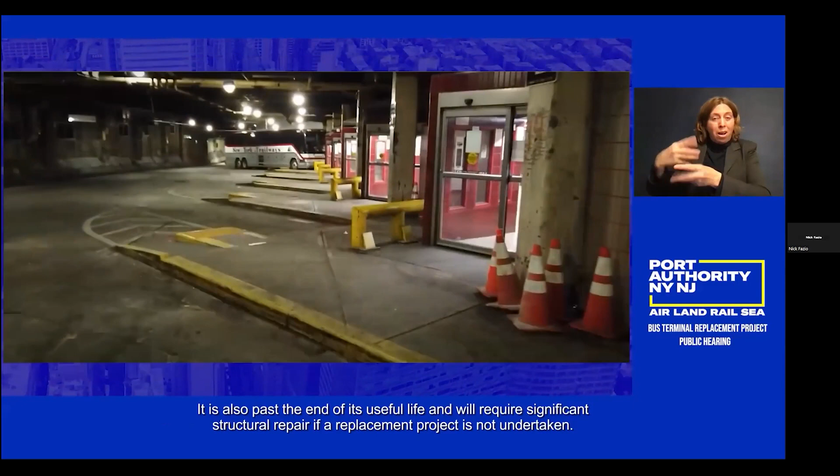The Port Authority needs to support the projected growth of commuter and intercity travel crossing the Hudson, and to address the functional and physical obsolescence of the existing terminal. The existing bus terminal is already at capacity and will not be able to meet future demand. It is also past the end of its useful life and will require significant structural repair if a replacement project is not undertaken. The repair would fix some of the issues facing the building today, but reduce the capacity of the facility to handle buses.

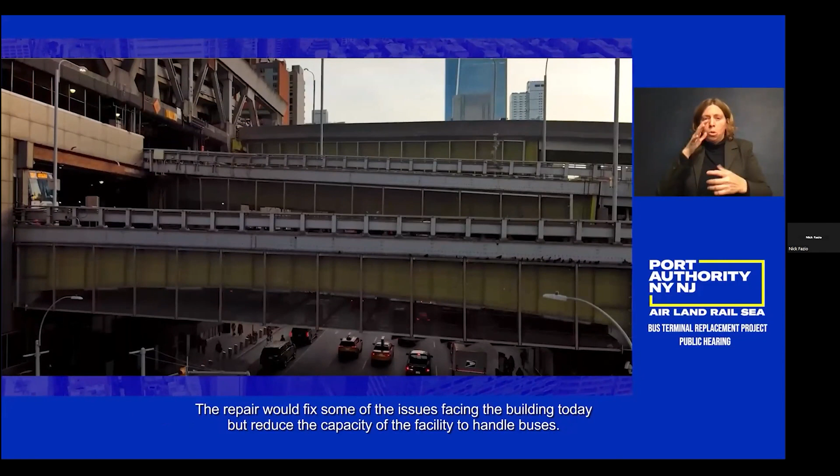The Port Authority needs to address bus operations and storage and staging.

Project goals: the project seeks to improve Trans-Hudson bus operations, improve the passenger experience within the terminal, provide seamless passenger accessibility to NYC transit connections, strive to achieve consistency with local and regional land use plans and initiatives, develop a project that optimizes life cycle costs, and reduce the impacts of bus services on the built and natural environments.

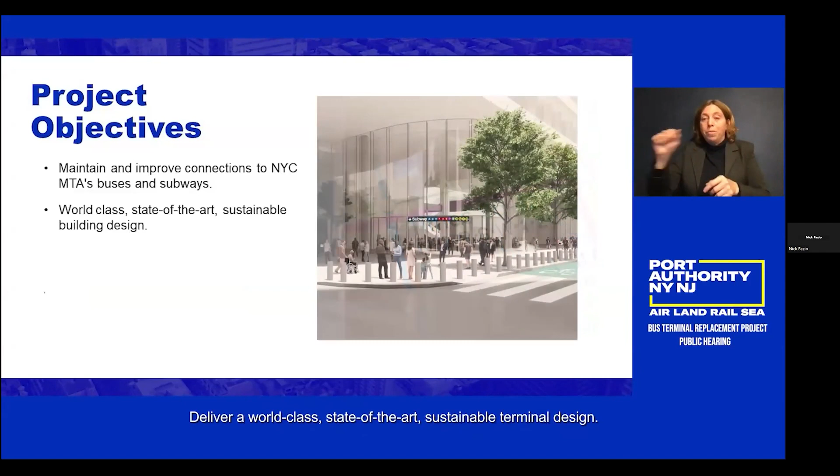Project objectives: an important guiding principle driving this project is the enhancement of the commuter experience within the bus terminal. This principle has shaped the following objectives: maintain and enhance connectivity with subways and mass transit, deliver a world-class, state-of-the-art, sustainable terminal design, preserve and improve pedestrian and ADA accessibility to traveler origins and destinations, and establish direct bus linkages to the Lincoln Tunnel.

There is more detailed information about the project purpose and need, its goals and objectives in the Draft Environmental Impact Statement Reports, Chapters 1 and 2.

Community feedback: in this section, we will review the extensive community engagement conducted to date.

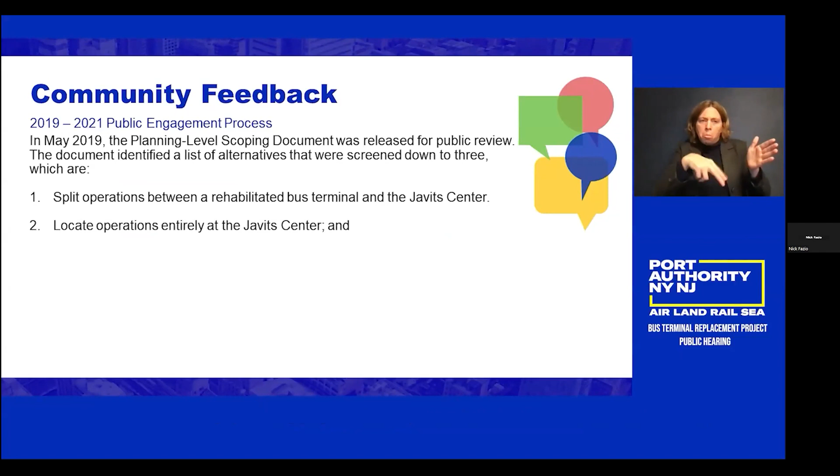In May 2019, the Port Authority released a planning-level scoping document for public review that commenced a 120-day comment period. The document identified a long list of alternatives that were screened down to three alternatives that best met the project purpose and need: split operations between a rehabilitated bus terminal and the Javits Center, locate operations entirely at the Javits Center, and retain operations at the existing bus terminal site and Port Authority properties.

The planning-level draft scoping document, summary of comments and responses, and final scoping report summarizing this process and outcome are all available on the project website, www.PABTreplacement.com. In June 2021, a notice of intent to prepare an environmental impact statement was released to the public, initiating a 45-day comment period to solicit feedback on the NEPA Scoping Information Packet.

Following this period, the final NEPA Scoping Information Packet was published summarizing comments received. This extensive public and stakeholder input during the planning level scoping and NEPA scoping periods informed the Port Authority in formulating its proposal for the modified proposed project, which is referred to as the Bus Terminal Replacement Project.

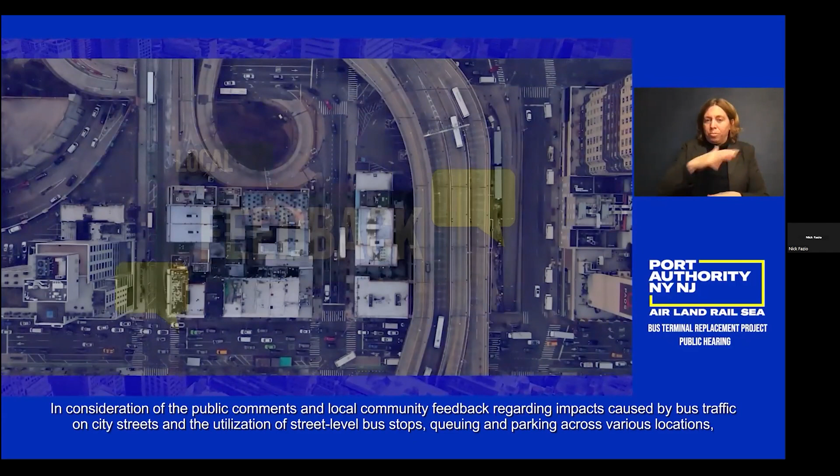Bus storage and staging: in consideration of public comments and local community feedback regarding impacts caused by bus traffic on city streets and the utilization of street-level bus stops, queuing and parking across various locations, the Port Authority responded by incorporating a bus storage and staging facility that will facilitate direct connections between the Lincoln Tunnel and the new terminal. The new ramp structure, connecting the tunnel, storage and staging facility, and new main terminal, will reduce and further minimize any impacts to city streets from buses accessing the replacement facility.

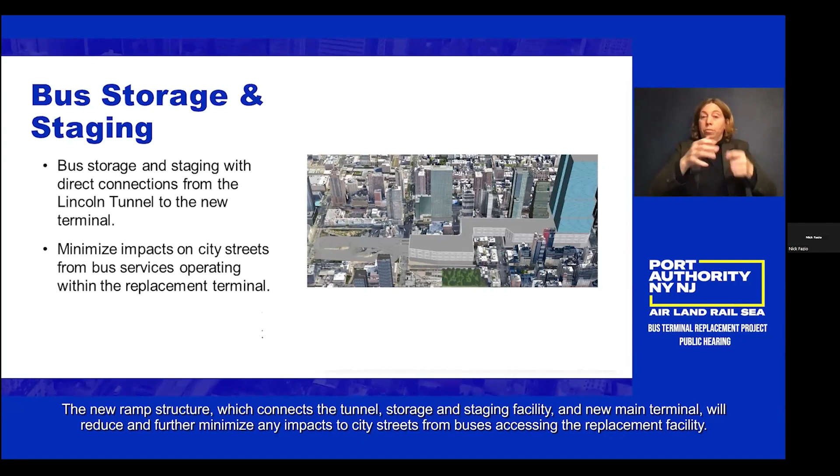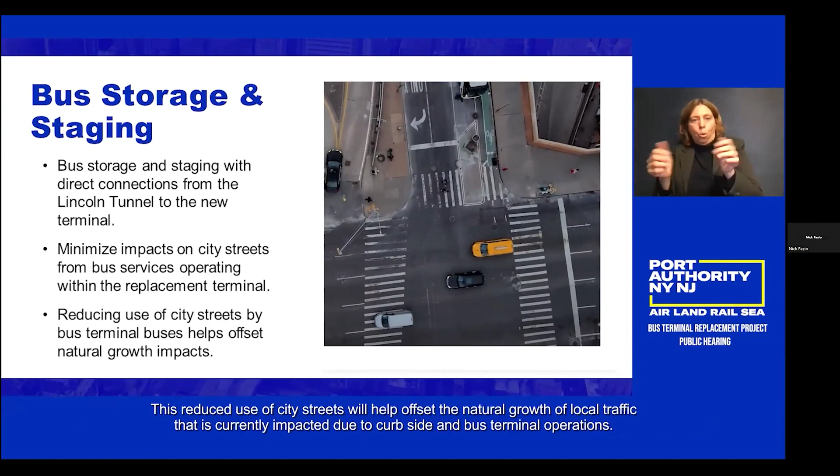This reduced use of city streets will help offset the natural growth of local traffic that is currently impacted due to curbside and bus terminal operations.

Additionally, during the planning level scoping process, the community requested that the Port Authority relocate the intercity buses presently operating at adjacent curbside locations into the scope of the project. Unlike a transit bus service, which has frequent stops within a city, an intercity bus service generally has a single stop in a city and travels long distances to reach other cities.

Presently, some intercity bus services operate within the existing terminal, while others operate curbside along city streets. In response to public comments regarding curbside operations, a dedicated floor within the new main terminal will now facilitate the efficient functioning of intercity bus operations.

Project overview and site plans. In this next section, we share renderings of each project component.

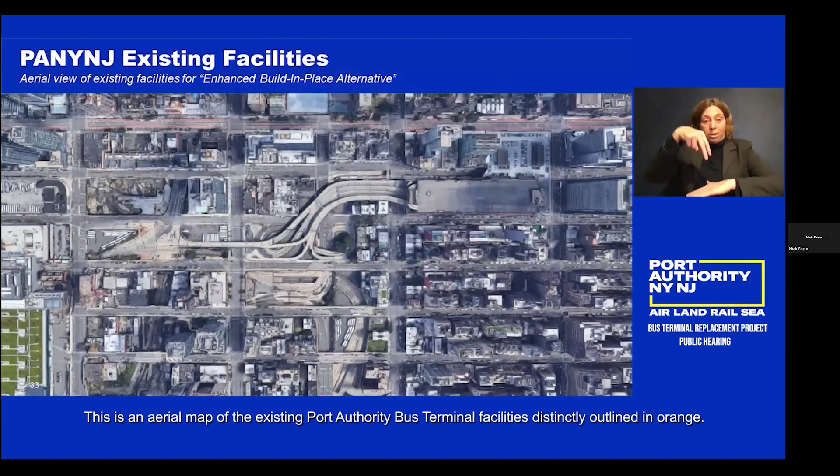This is an aerial map of the existing Port Authority bus terminal facilities, distinctly outlined in orange. The facilities extend from 8th Avenue to 11th Avenue between 39th Street and 42nd Street.

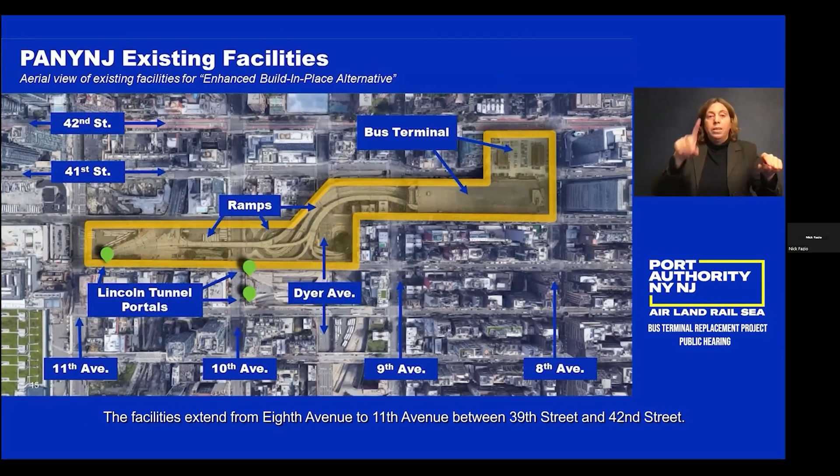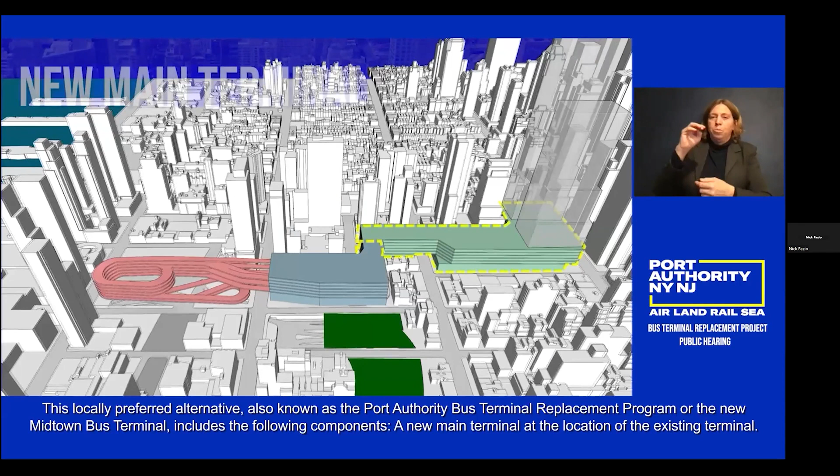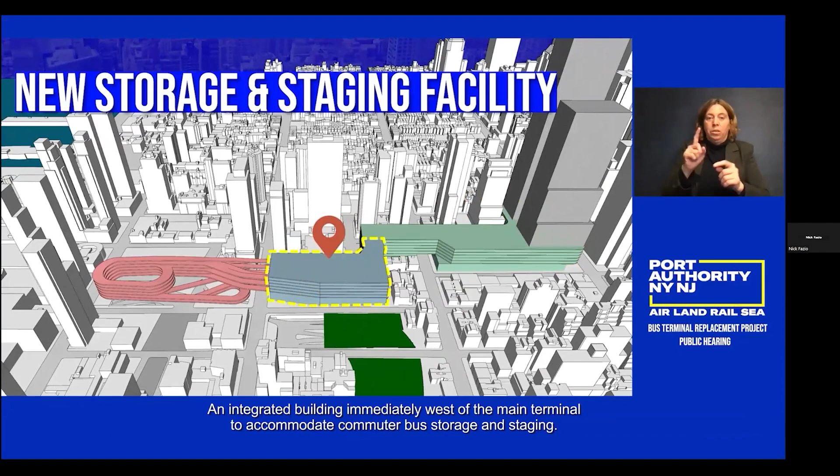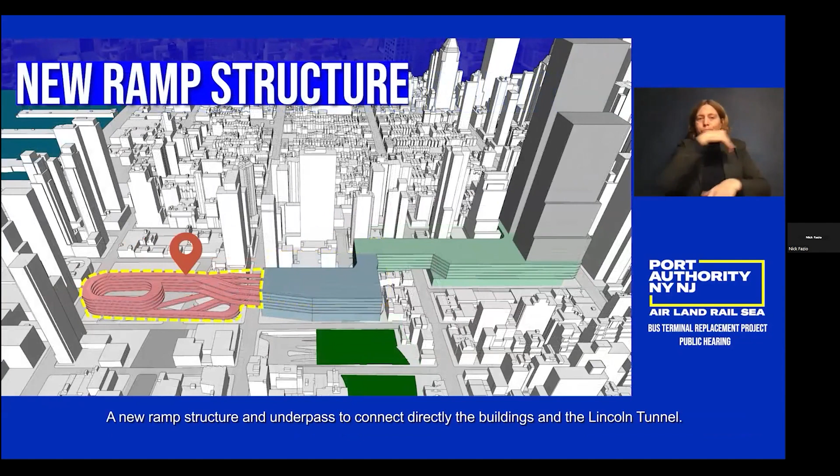Project components. This locally preferred alternative, also known as the Port Authority Bus Terminal Replacement Program, or the New Midtown Bus Terminal, includes the following components: a new main terminal at the location of the existing terminal, utilization of Port Authority property, an integrated building immediately west of the main terminal to accommodate commuter bus storage and staging, a new ramp structure and underpass to connect directly the buildings and the Lincoln Tunnel, publicly accessible open space, and private development at 2 locations on Port Authority property.

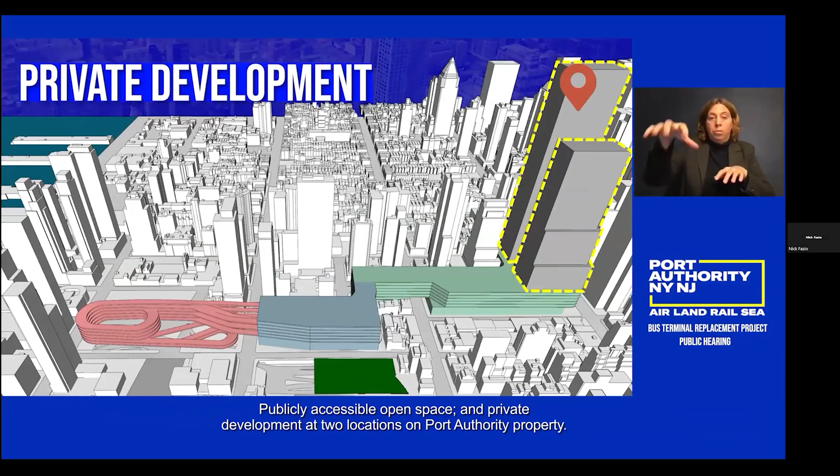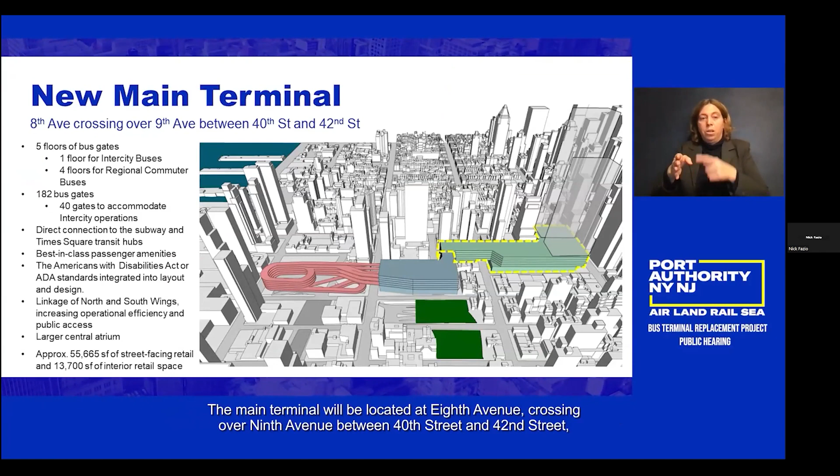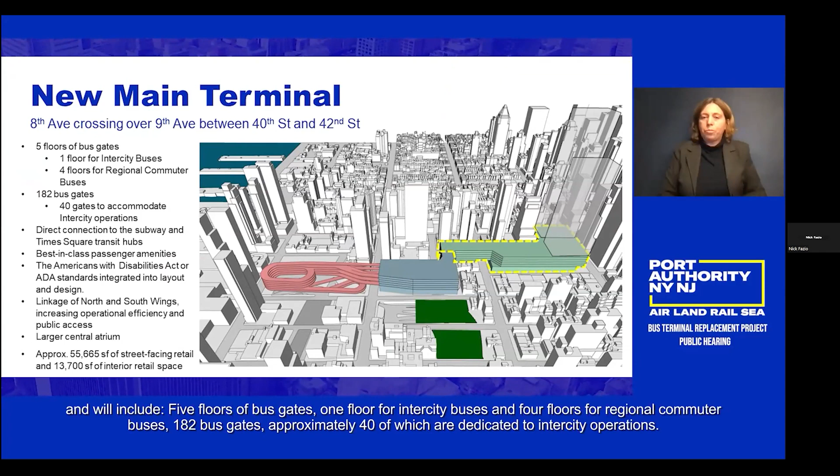Now we will walk through each major component of the proposed project. The main terminal will be located at 8th Avenue crossing over 9th Avenue between 40th Street and 42nd Street and will include 5 floors of bus gates, 1 floor for intercity buses, and 4 floors for regional commuter buses. 182 bus gates, approximately 40 of which are dedicated to intercity operations.

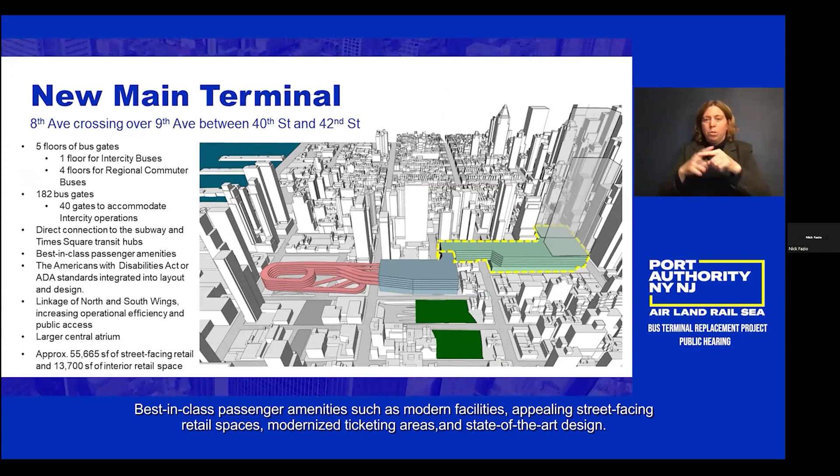Direct connection to the 8th Avenue subway and Times Square transit hubs. Best-in-class passenger amenities such as modern facilities, appealing street-facing retail spaces, modernized ticketing areas, and state-of-the-art design. The Americans with Disabilities Act, or ADA standards, integrated into layout and design.

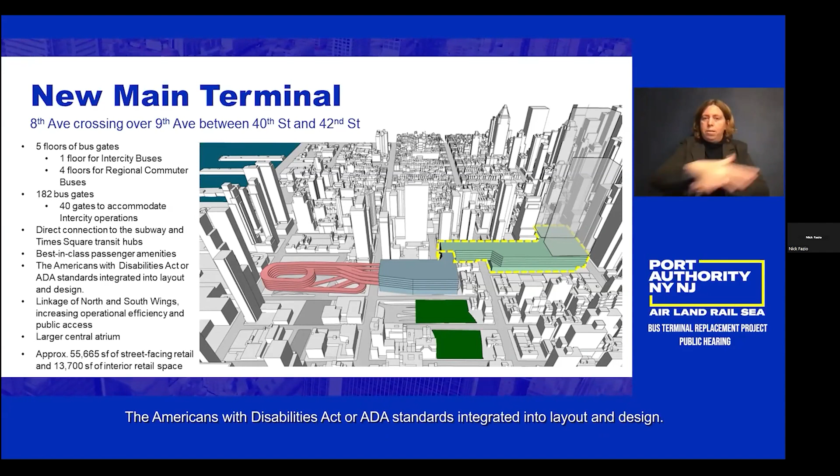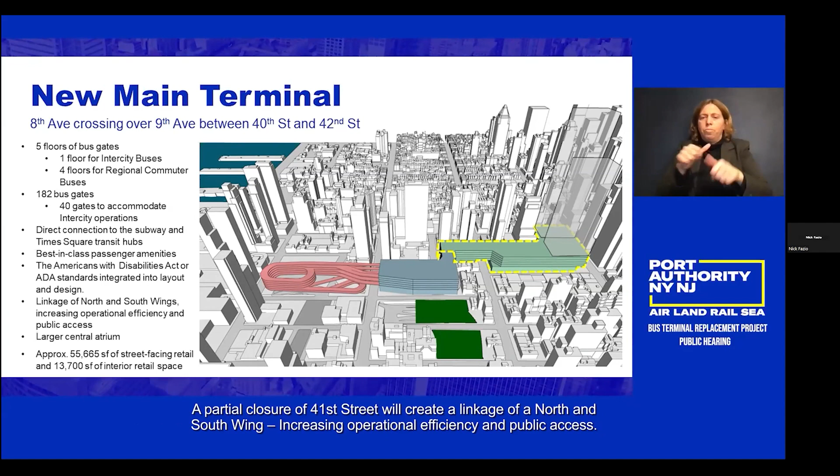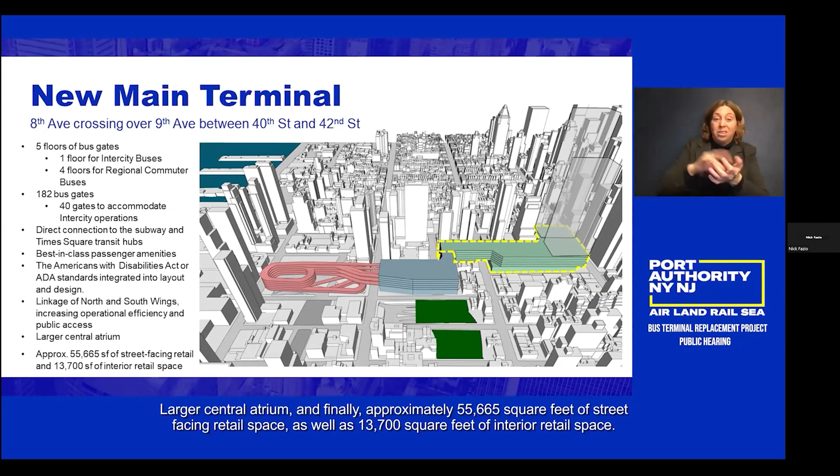A partial closure of 41st Street will create a linkage of a north and south wing, increasing operational efficiency and public access. Larger central atrium, and finally, approximately 55,665 square feet of street-facing retail space, as well as 13,700 square feet of interior retail space.

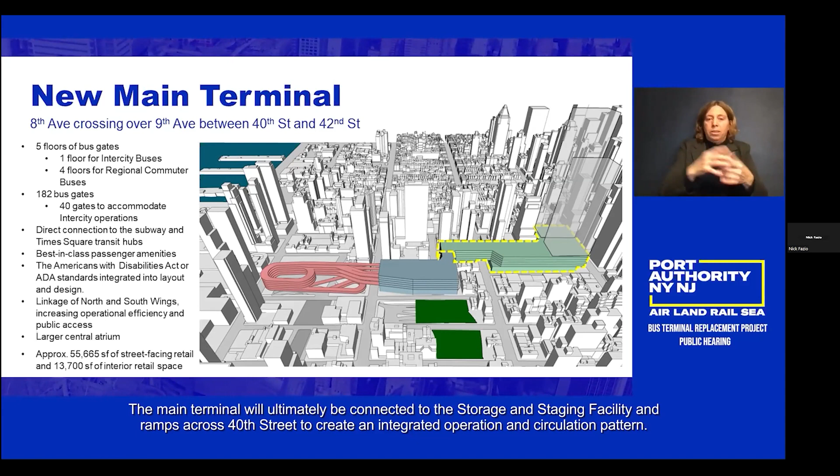The main terminal will ultimately be connected to the storage and staging facility and ramps across 40th Street to create an integrated operation and circulation pattern.

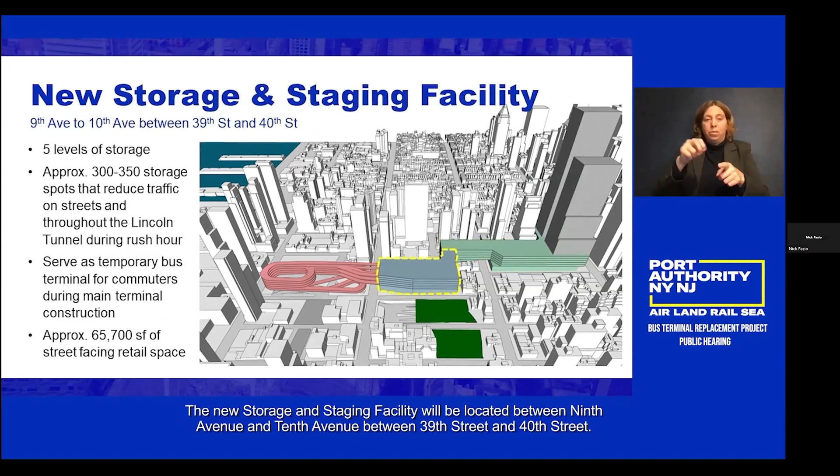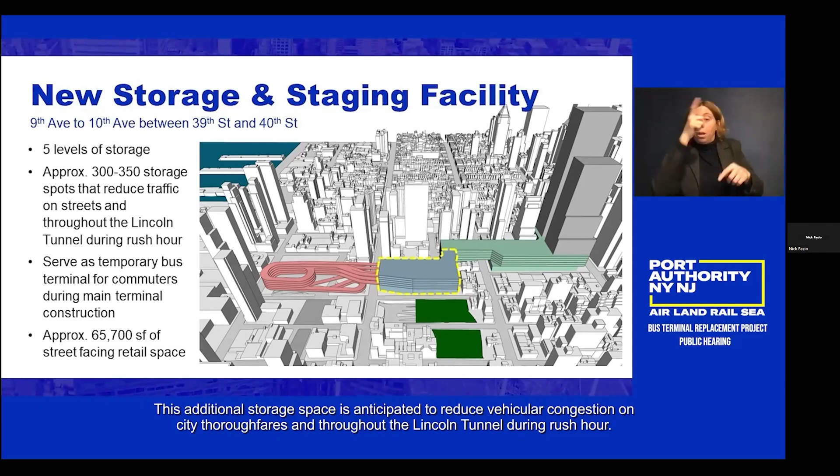The new storage and staging facility will be located between 9th Avenue and 10th Avenue between 39th Street and 40th Street. This facility is designed to encompass 5 levels of storage, accommodating approximately 300 to 350 storage spots. This additional storage space is anticipated to reduce vehicular congestion on city thoroughfares and throughout the Lincoln Tunnel during rush hour. The storage and staging facility will serve as a temporary bus terminal for commuters during the construction phase of the main terminal.

Additionally, the facility will provide approximately 65,700 square feet of additional at-grade retail space.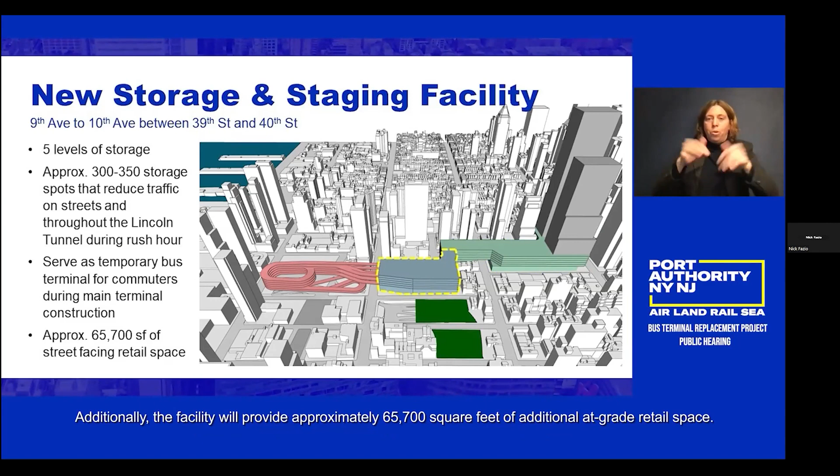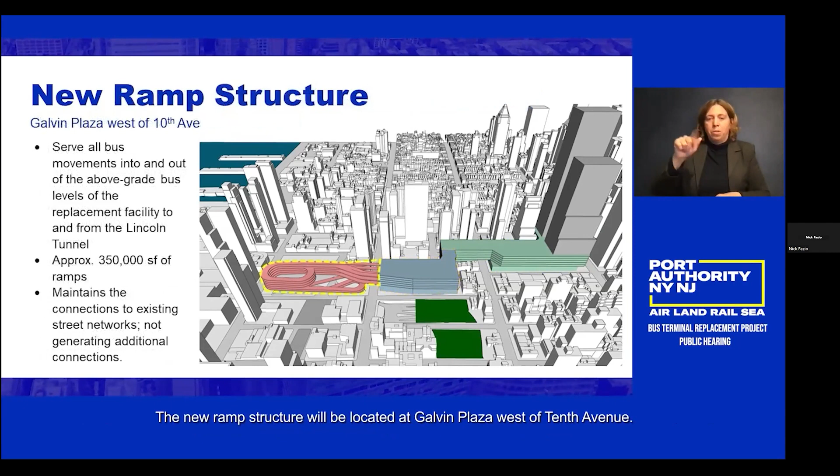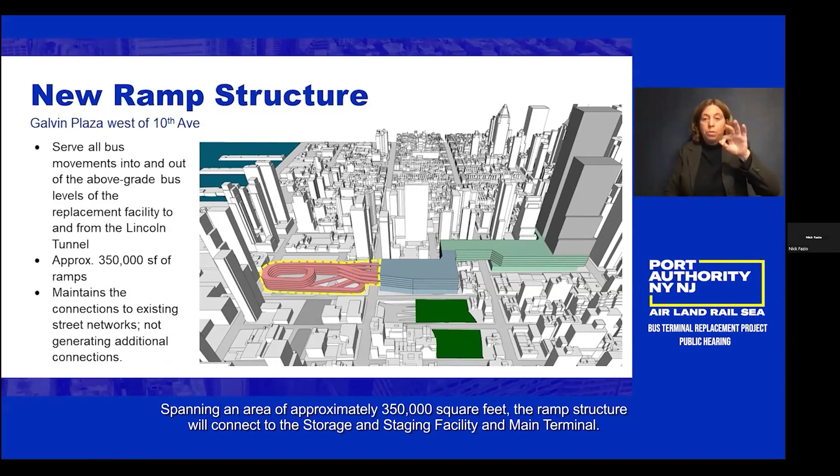The new ramp structure will be located at Galvin Plaza, west of 10th Avenue. The ramp structure will serve all bus movements into and out of the above-grade bus levels of the replacement facility to and from the Lincoln Tunnel. Spanning an area of approximately 350,000 square feet, the ramp structure will connect to the storage and staging facility and main terminal.

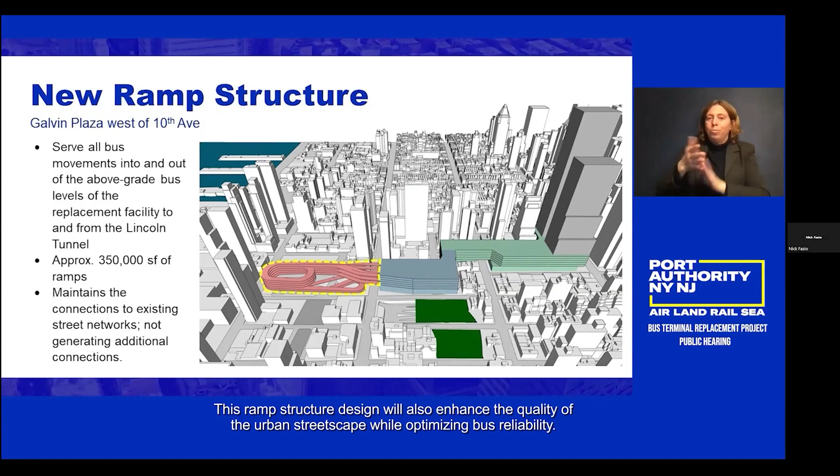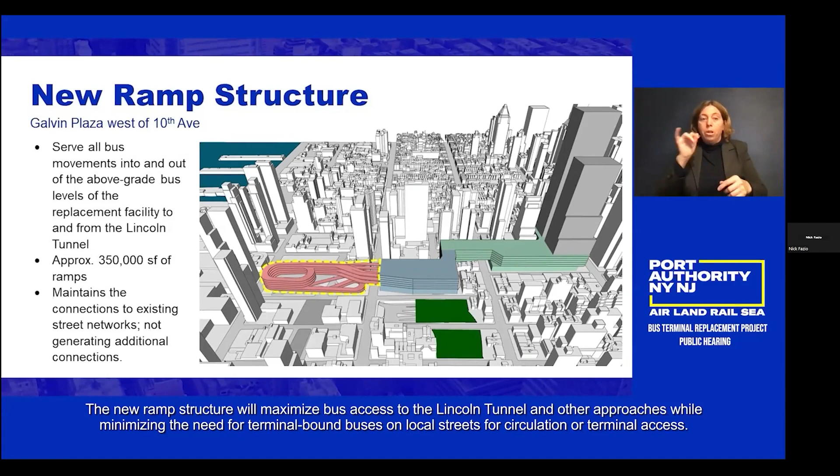The design of the ramps will greatly relieve congestion on 40th Street and 9th Avenue. This ramp structure design will also enhance the quality of the urban streetscape while optimizing bus reliability. The new ramp structure will maximize bus access to the Lincoln Tunnel and other approaches while minimizing the need for terminal-bound buses on local streets for circulation or terminal access.

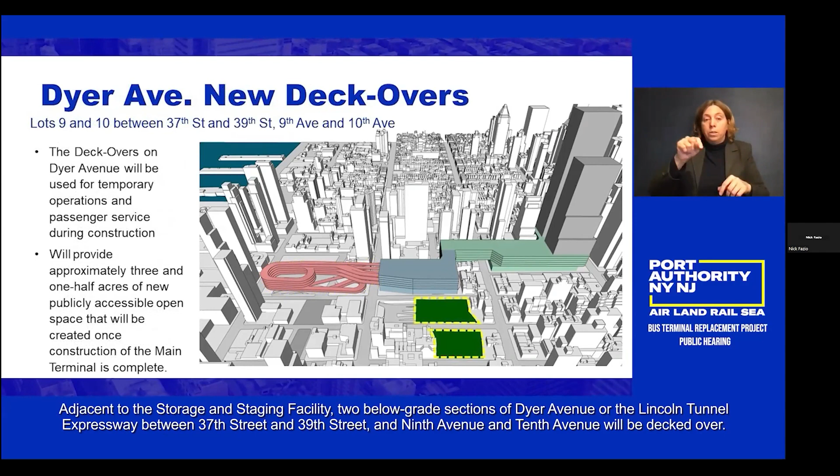Adjacent to the storage staging facility, 2 below-grade sections of Dyer Avenue, or the Lincoln Tunnel Expressway, between 37th Street and 39th Street, and 9th Avenue and 10th Avenue, will be decked over. The deckovers on Dyer Avenue will serve as a location for temporary bus operations and potentially for construction staging during the development phase of the replacement terminal.

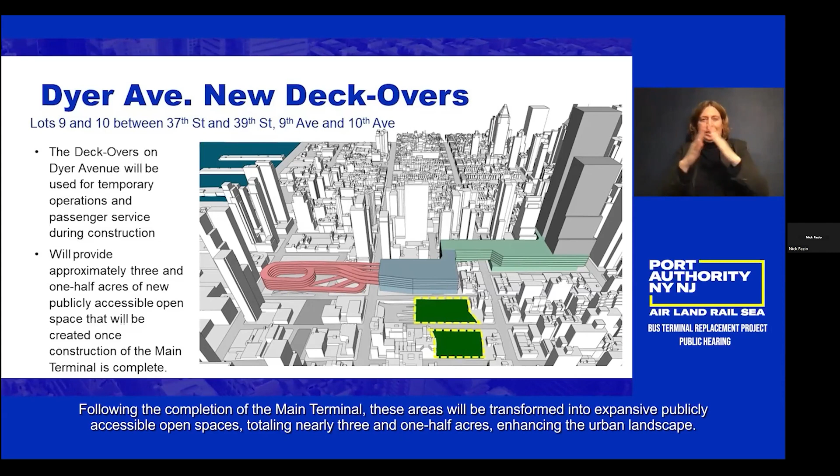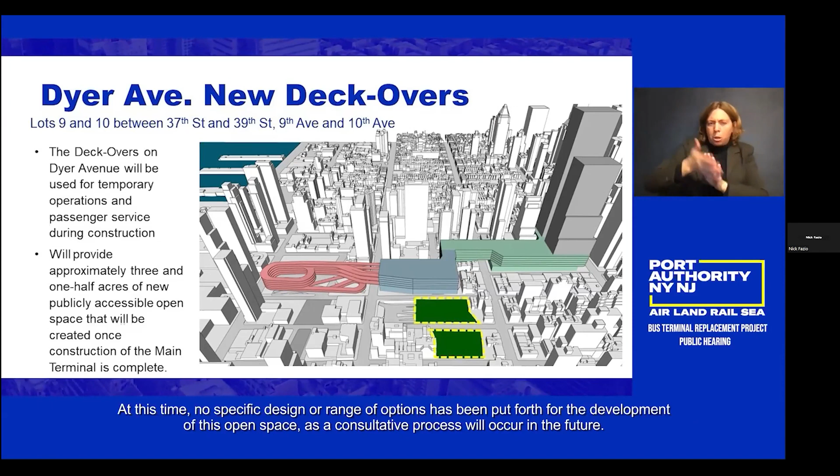Following the completion of the main terminal, these areas will be transformed into expansive, publicly accessible open spaces, totaling nearly 3½ acres, enhancing the urban landscape. The Port Authority is committed to collaborating closely with community stakeholders on the design and operation of the open space. At this time, no specific design or range of options has been put forth for the development of this open space, as a consultative process will occur in the future.

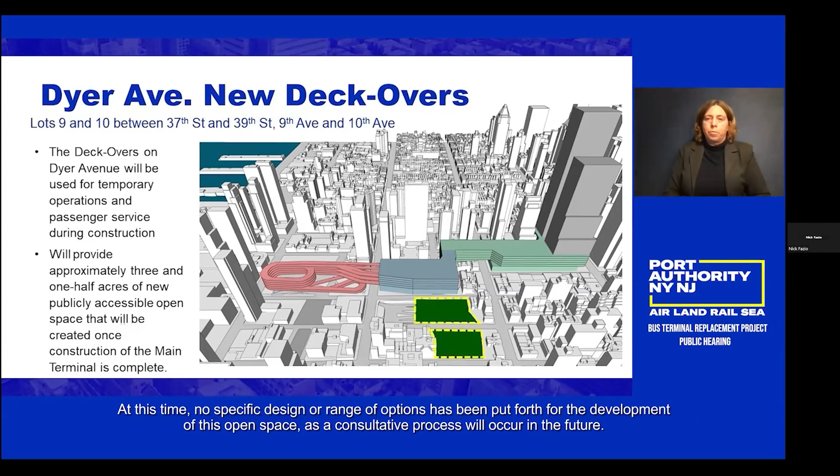As part of the project, 2 private development towers are proposed to be built on Port Authority property located on 8th Avenue between 40th Street and 42nd Street. The 2 towers are proposed as commercial offices.

Tower 1 would contain up to approximately 3 million gross square feet of commercial space with an approximate height of 1,200 feet above grade and a lobby entrance located on the corner of 8th Avenue and 42nd Street.

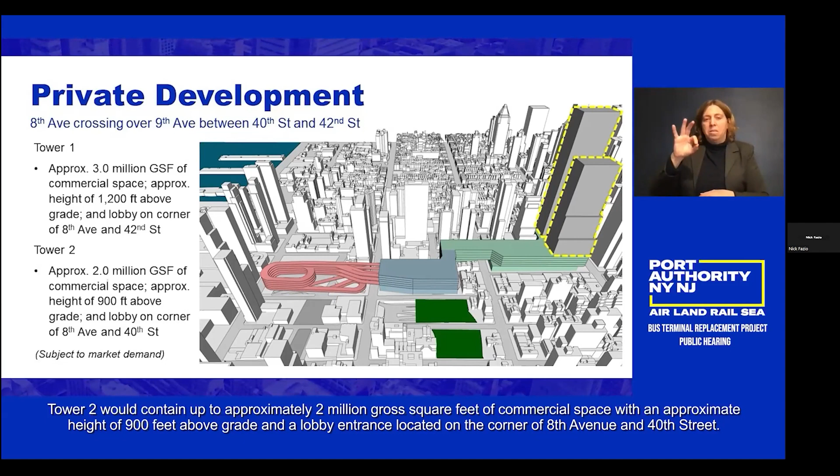Tower 2 would contain up to approximately 2 million gross square feet of commercial space, with an approximate height of 900 feet above grade and a lobby entrance located on the corner of 8th Avenue and 40th Street. These approximations are subject to market demand. The funding strategy for the project would include financing from this private development and payment in lieu of taxes.

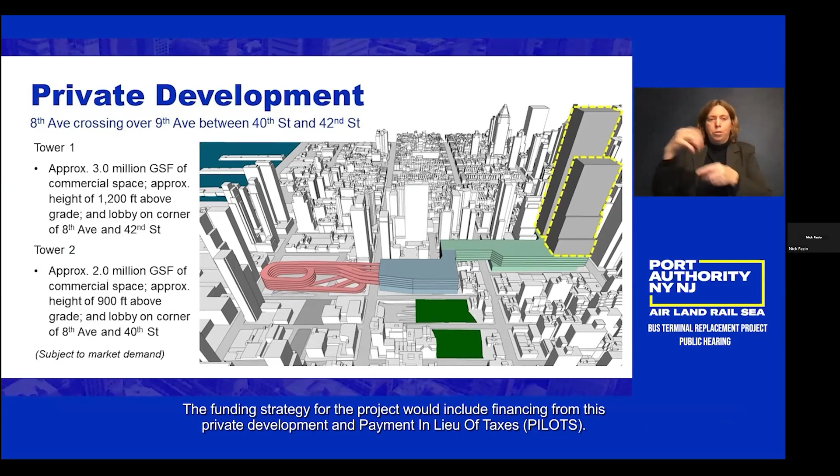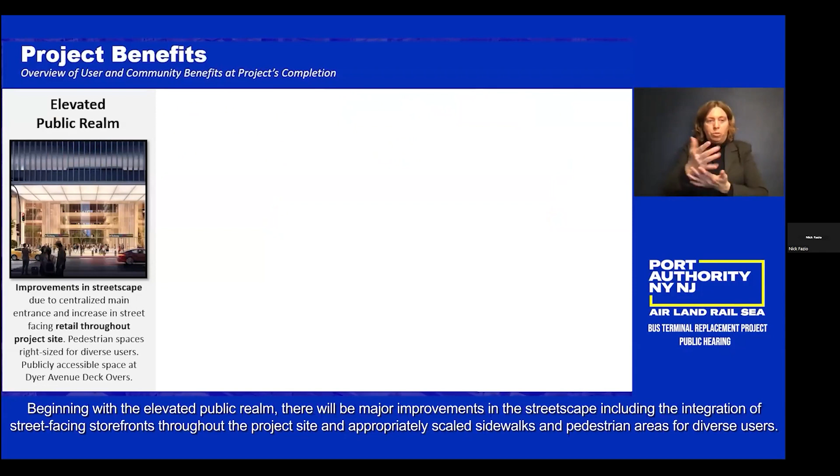Upon completion, the Port Authority Bus Terminal will provide many advantages to its diverse customers, community members, and various stakeholders, including an elevated public realm, significantly enhanced user experience, improved vehicular and pedestrian flow, and green energy transition, to name a few. Beginning with the elevated public realm, there will be major improvements in the streetscape, including the integration of street-facing storefronts throughout the project site and appropriately scaled sidewalks and pedestrian areas for diverse users. The conversion of the Dyer Avenue deck overs into publicly accessible space will further augment these improvements to the public realm.

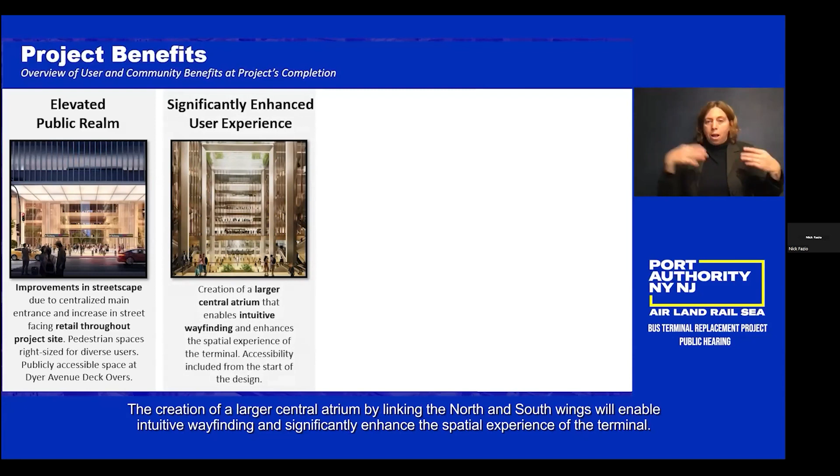The creation of a larger central atrium by linking the north and south wings will enable intuitive wayfinding and significantly enhance the spatial experience of the terminal.

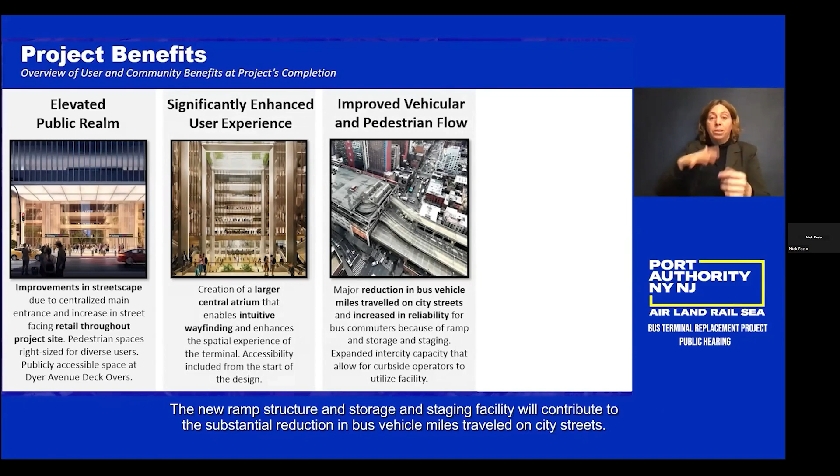The new ramp structure and storage and staging facility will contribute to the substantial reduction in bus vehicle miles traveled on city streets. This streamlined traffic flow will enhance the reliability of bus commutes, benefiting the experience of commuters. Moreover, the expanded intercity capacity will accommodate curbside operators using the facility.

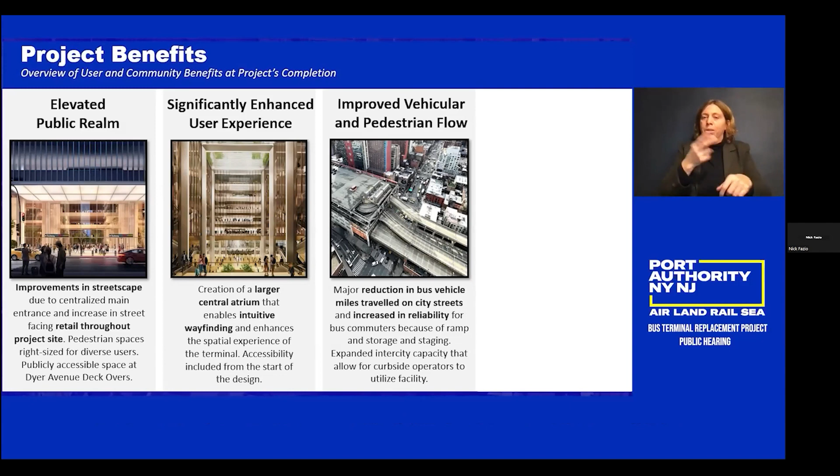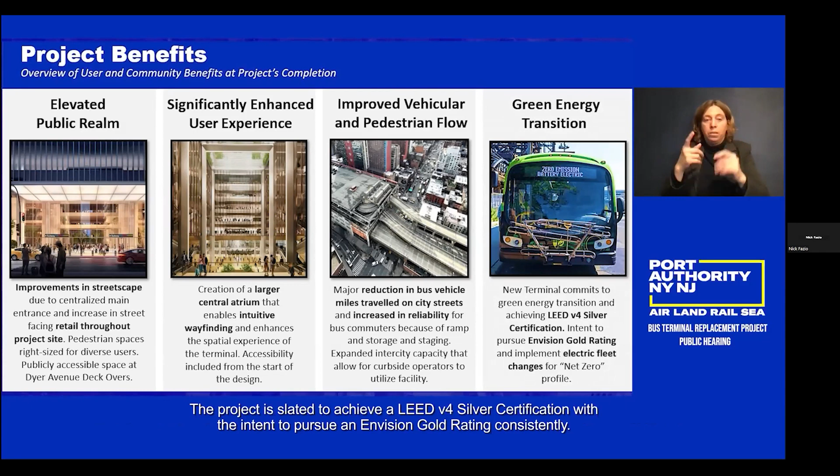Lastly, the new terminal will embrace a green energy transition. The project is slated to achieve a LEED v4 Silver certification, with the intent to pursue an Envision Gold rating consistently. This aligns with the adoption of electric fleet changes and the incorporation of modern energy-efficient systems within the terminal, striving towards a net zero carbon profile.

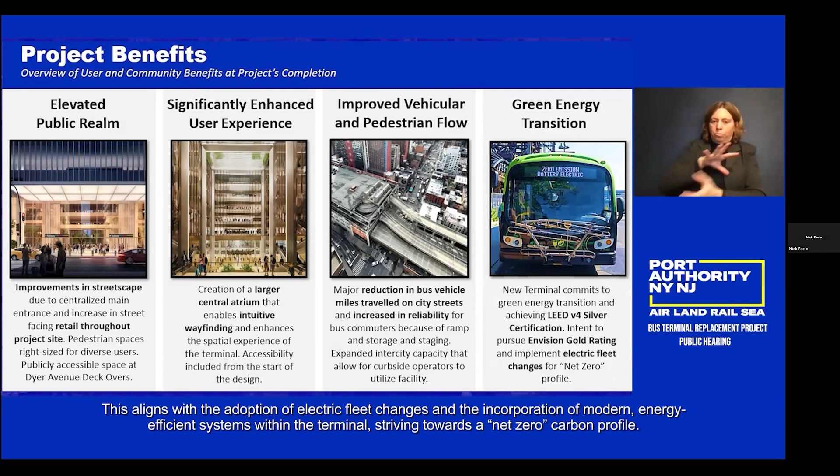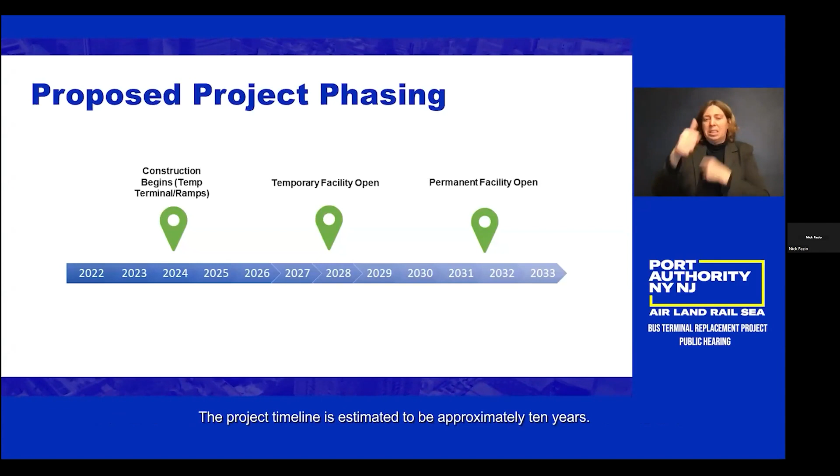In this next section, we will provide an overview of the project phasing as well as the construction process. The project timeline is estimated to be approximately 10 years. Following scoping, the first 2.5 years of the project, beginning in January 2022, consists of an environmental review and the Uniform Land Use Review Procedure, or ULURP, for the proposed project.

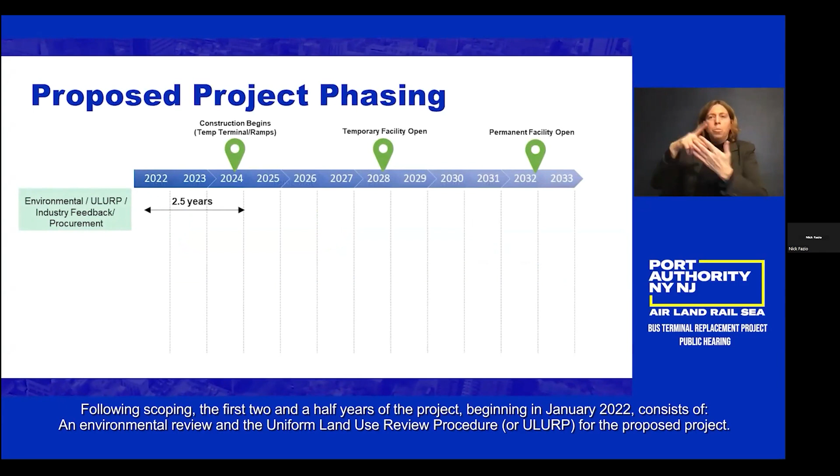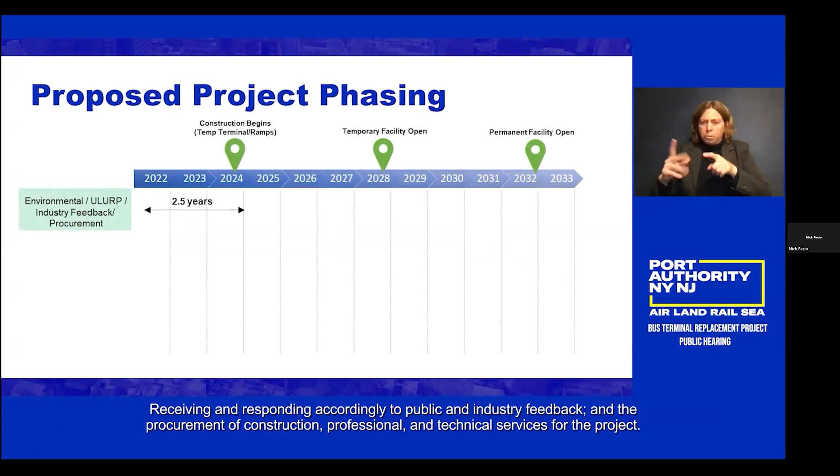Receiving and responding accordingly to public and industry feedback, and the procurement of construction, professional, and technical services for the project. The proposed project's timeline entails an estimated 8-year construction period, starting in 2024 through the end of 2032.

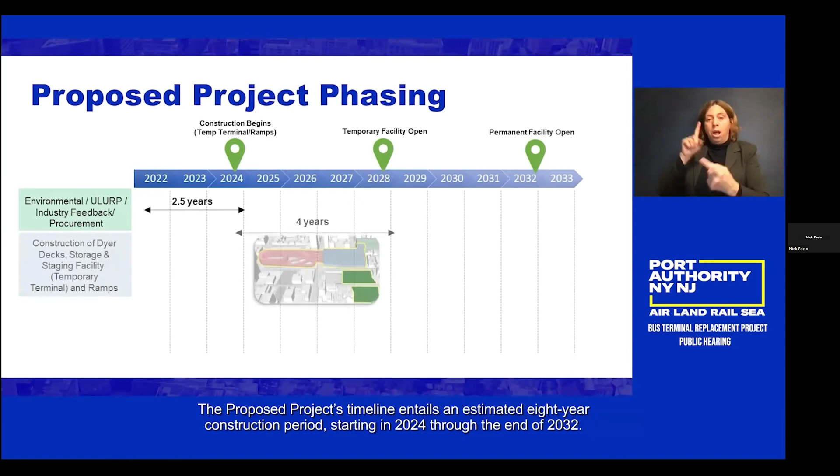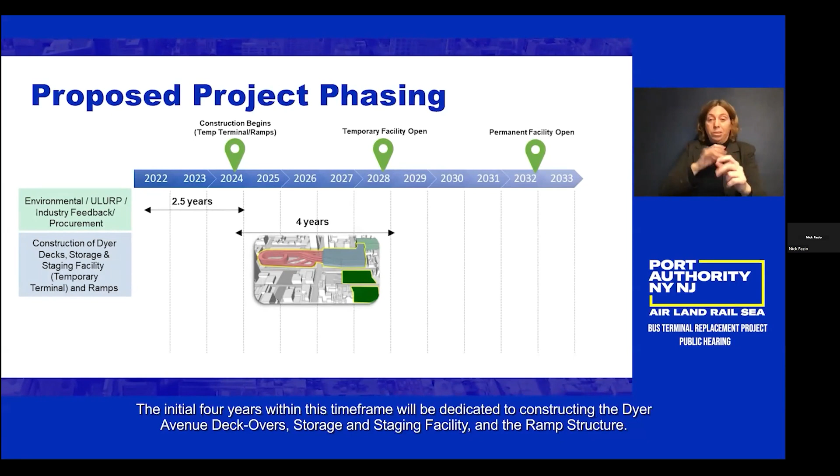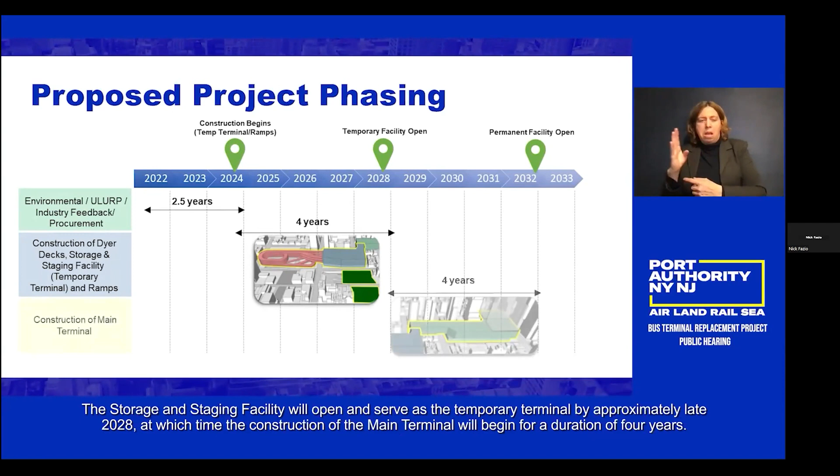The initial 4 years within this timeframe will be dedicated to constructing the Dyer Avenue deckovers, storage and staging facility, and the ramp structure. The storage and staging facility will open and serve as the temporary terminal by approximately late 2028, at which time the construction of the main terminal will begin for a duration of 4 years.

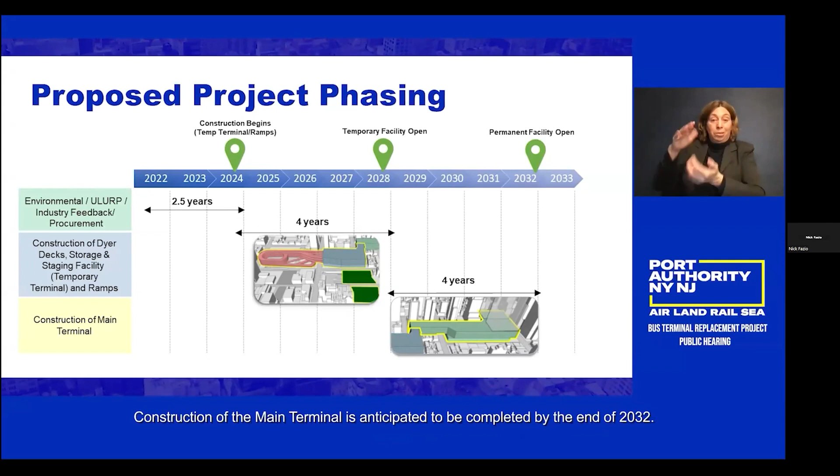The construction of the main terminal will incorporate foundational work for the private development set to occur independently in the future. Construction of the main terminal is anticipated to be completed by the end of 2032. The private development will occur after then and are expected to be completed by 2040.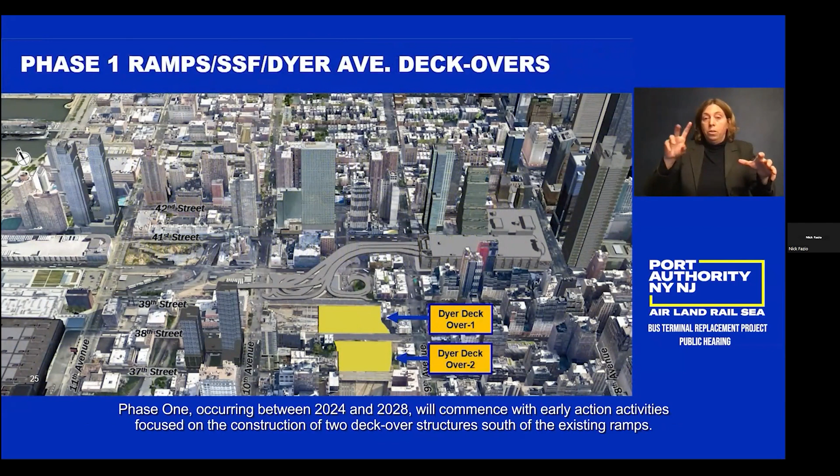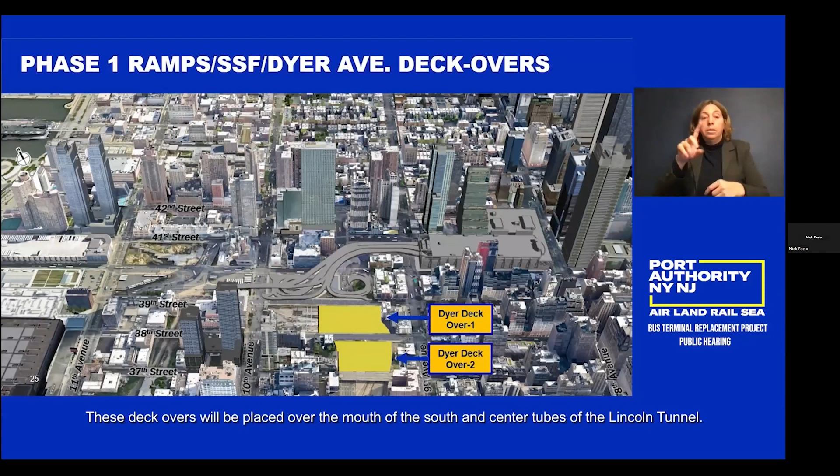The following renderings will depict the 8-year construction period organized into 2 major phases. Phase 1, occurring between 2024 and 2028, will commence with early action activities focused on the construction of 2 deck-over structures south of the existing ramps. These deckovers will be placed over the mouth of the south and center tubes of the Lincoln Tunnel.

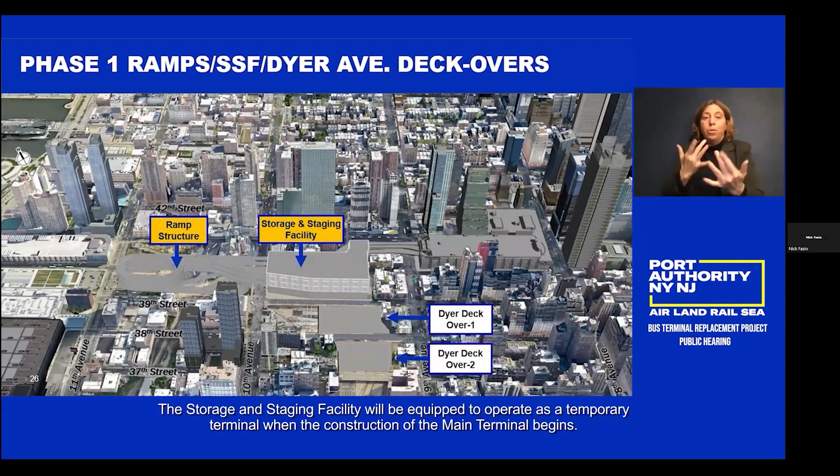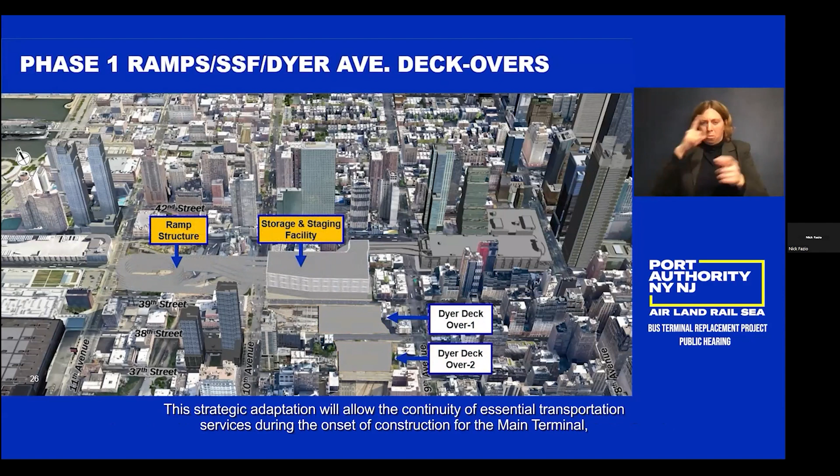Additionally, Phase 1 will include the construction of the ramp structure and storage and staging facility. The storage and staging facility will be equipped to operate as a temporary terminal when the construction of the main terminal begins. This strategic adaptation will allow the continuity of essential transportation services during the onset of construction for the main terminal, thus minimizing disruptions and maintaining the uninterrupted provision of transportation services throughout the subsequent phases of the project.

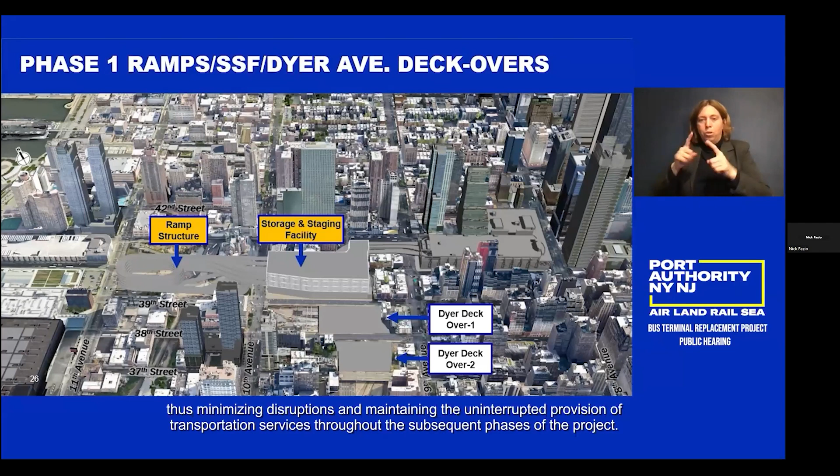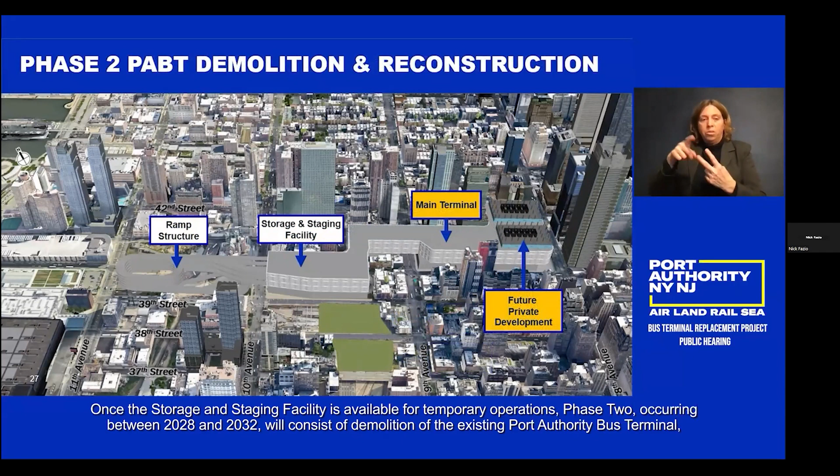Once the storage and staging facility is available for temporary operations, Phase 2, occurring between 2028 and 2032, will consist of demolition of the existing Port Authority bus terminal, construction of the new main terminal, as well as the foundational work of 2 private development towers.

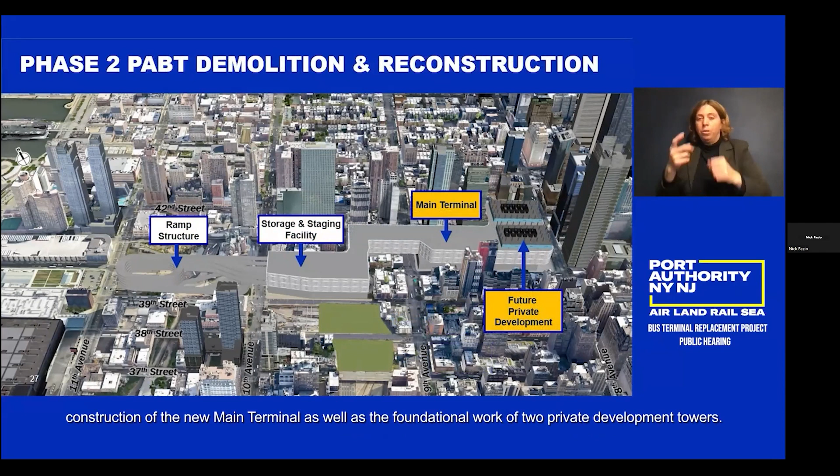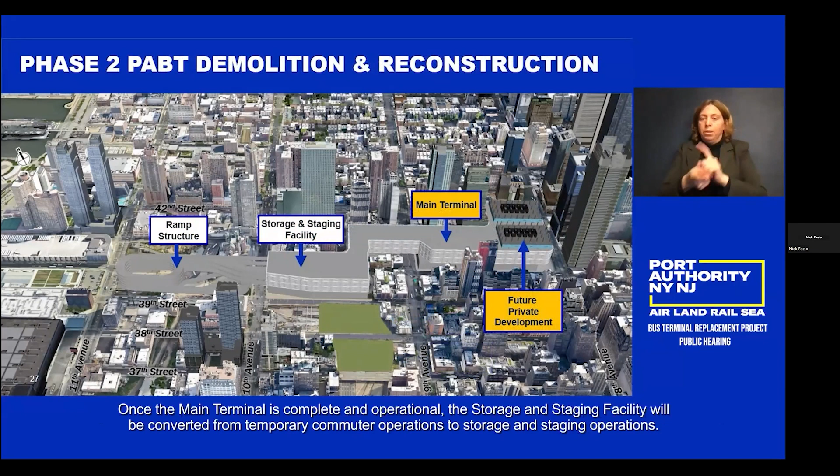Once the main terminal is complete and operational, the storage and staging facility will be converted from temporary commuter operations to storage and staging operations. The Dyer Avenue deckovers can then be converted to public open space, with the foundation and cores of 2 private towers incorporated in the design and construction of the new bus terminal.

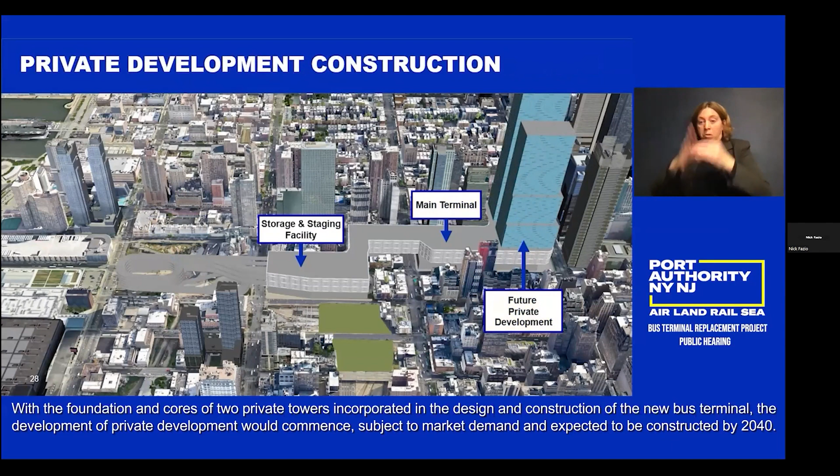The development of private development would commence subject to market demand and expected to be constructed by 2040. The sale of the development rights and payment in lieu of taxes for the 2 commercial office towers are needed to fund the project.

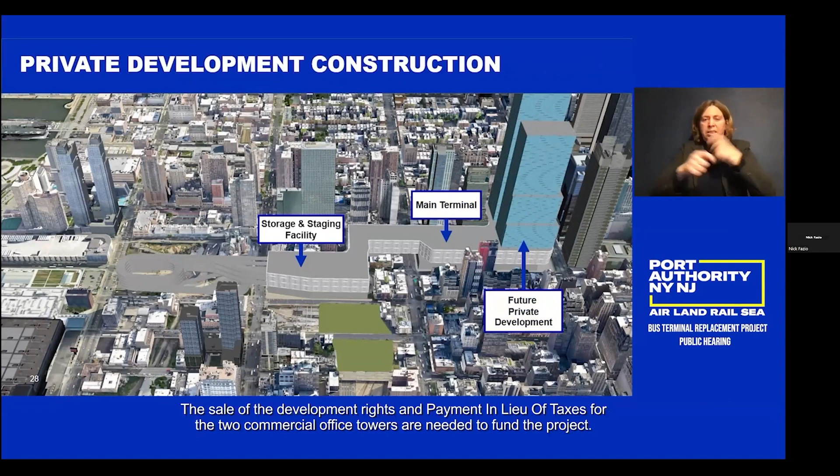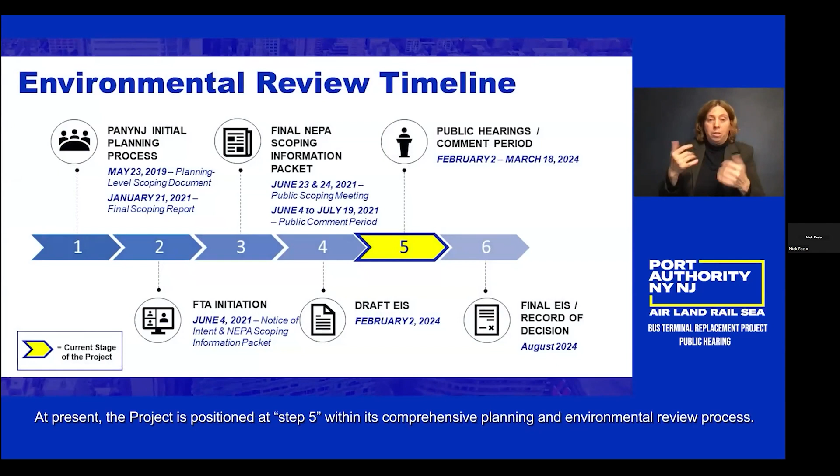In this next section, we will conclude with an overview of the environmental timeline and next steps. At present, the project is positioned at Step 5 within its comprehensive planning and environmental review process. The DEIS public hearings and 45-day comment period began with the publication of the DEIS.

In terms of the next steps, the project team will consolidate all comments received during public meetings, including those submitted via the project website, email, mail, and voicemail. Then the project will progress to Step 6, in which the team will prepare and release a final environmental impact statement and the record of decision by the summer of 2024.

Following this presentation, attendees will have the opportunity to provide comments. For those who have pre-registered, the moderator will call upon your name in the order your registration was received. Each participant will have 3 minutes to articulate their comments. If you have not pre-registered, you may request to do so once the public hearing is underway, and you will be called upon if time permits.

Alternatively, written submissions of comments can be submitted before and after the in-person public hearing through the designated website www.pabtreplacement.com, by email at pabtreplacementnipa@panyj.gov, by phone leaving a voicemail at 929-502-7304, or by postal correspondence to the Port Authority of New York and New Jersey, 4 World Trade Center, 150 Greenwich Street, 25th floor, New York, New York, zip code 10007, attention Miss Elizabeth Rogak, Esquire, or to the Federal Transit Administration, Region 2, 1 Bowling Green, Room 428, New York, New York, zip code 10004-1415, attention Mr. Donald Burns, FTA Director of Planning and Program Development.